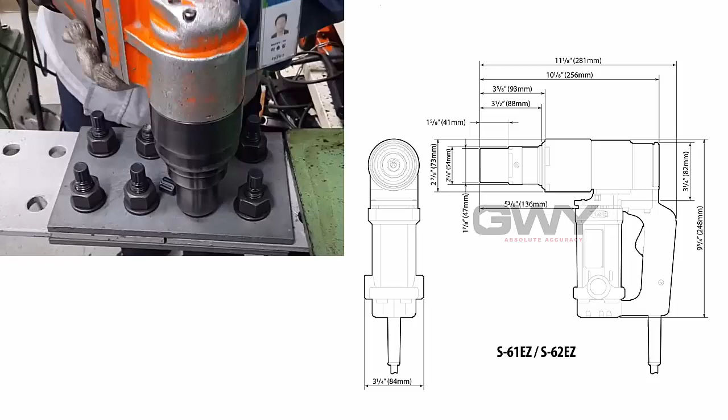When working with structural steel bolts, especially TC or tension control bolts, it's important to understand how the field actually installs those bolts and whether or not there's clearance to install them. If you look at the image at the upper left hand corner, you can see the TC gun or electric wrench, which is fairly large in dimensions based on the image shown at the lower right.

You'll also notice that on the bolt itself, on a tension control bolt, there's an extra spline at the end of the bolt near the nut side, away from the head. The TC gun or TC wrench will actually chop this off or pop it off after the bolt is fully tensioned in the field.

However, from an installation point of view, and whether or not there's enough clearance to install the length of that bolt from a certain direction, it's important to understand that spline length is also included. The Tekla Structures 3D model doesn't include this spline length in the visual display of the bolt, so it can sometimes be misleading whether or not there's enough clearance to install the bolt.

One other thing that's important to understand about bolt installation, especially with TC bolts, is that a TC or tension control bolt is always tightened from the nut side, which is exactly what we see in the image at the upper left. In this case, the bolt itself would have been installed from underneath these plates, stuck through the holes, and then tightened from the top side. This is important to understand for the installation and how the field is going to do these bolts in relationship to how you're going to detail things in the model.

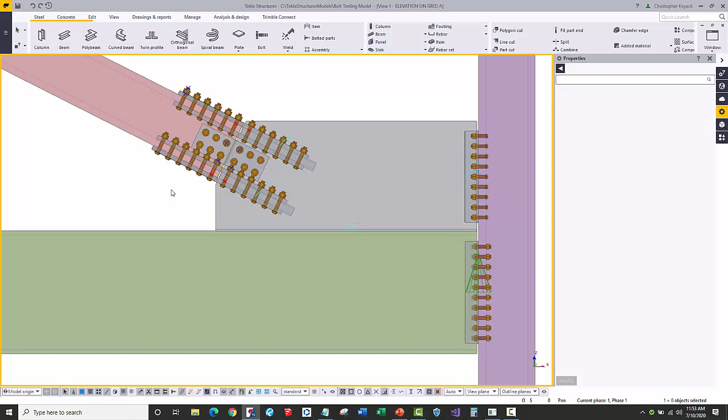Here we have a wide flange brace that is fully bolted. We'll see that there are fairly large bolts here. If we click on this, we'll see that this is a 1 1/8" diameter A490 tension control bolt in a slip critical condition.

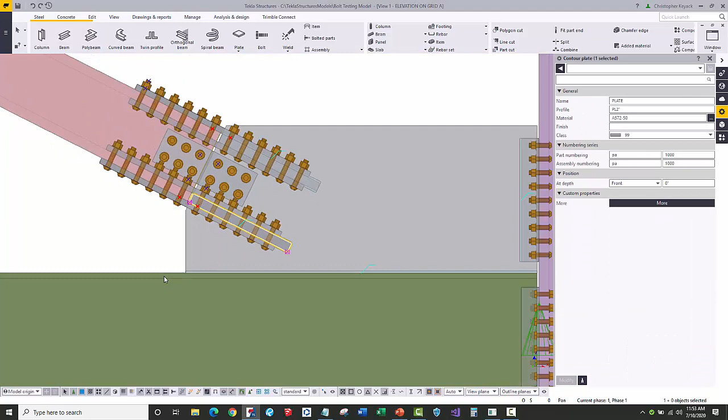Now, when we look at this, you'll see that there are bolts here at the web as well as at the flange. The gusset plate, as well as these fin plates here, are going to be shop attached to the beam assembly. So we need to make sure that this bolt can be inserted in this spot, especially with this field applied flange plate, and whether it can be tightened. We need to determine: can it be installed from underneath here, or can it be installed from within the brace, and is there enough room or clearance to actually tighten this bolt?

To help us review this, we've created a tool called Bolt Clearance Check. What we're going to do is come over here to the Application Components panel, go underneath the JMT Tools group, and there's a Bolt Clearance Check.

Now this is a plugin, so it's parametric. All we need to do is single click on it, and then it's going to prompt us to pick a bolt here at the lower left hand corner. So we'll go ahead and pick on a bolt, and then it says pick the points. The reason why we're picking the points is we're trying to say where the head of the bolt is going to be, in order to show the installation or clearance direction.

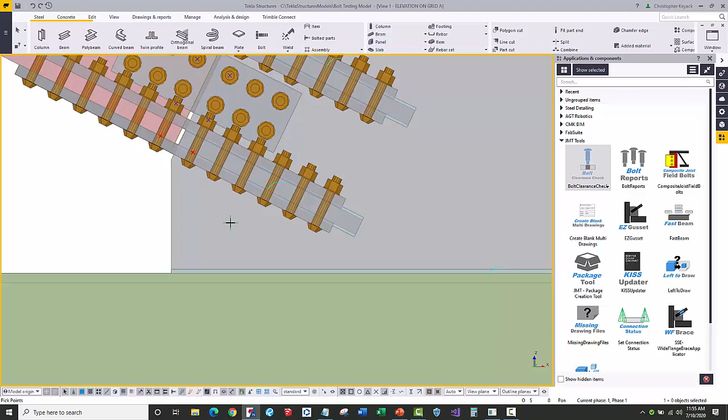Now before we do this, I'm going to double click and open up the dialog box, because there are two different options here: the ability to check the clearance based on bolt insertion, or actually looking at the wrench. You could potentially do both, showing the bolt on one side and the electronic wrench on the other.

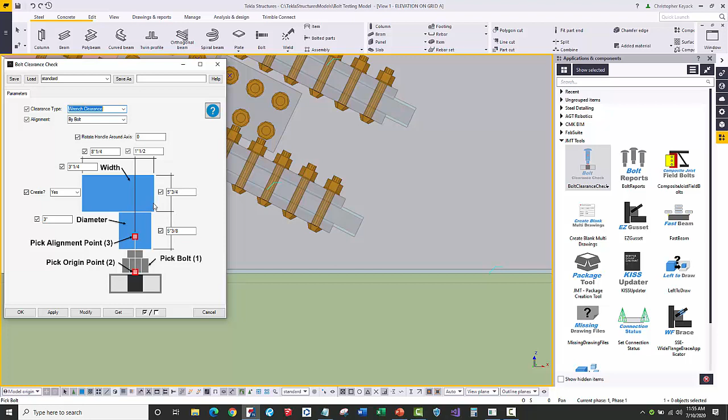If we choose the wrench clearance option, you'll see that the image changes and shows a bunch of different fields that you can fill in based on the size of the TC gun or the heavy hex electronic wrench that you're working with. In the case that you can actually use a hand-driven wrench, like in really tight conditions, you can fill in some of those dimensions as well. Let's go ahead and start with bolt insertion.

Now on bolt insertion, there's the ability to tell it how you want to align the bolt. Do you want it to be based on the actual direction of the bolt and the way it's oriented in the model, or do you want it to follow two specific points that you pick? You have the choice to do either one.

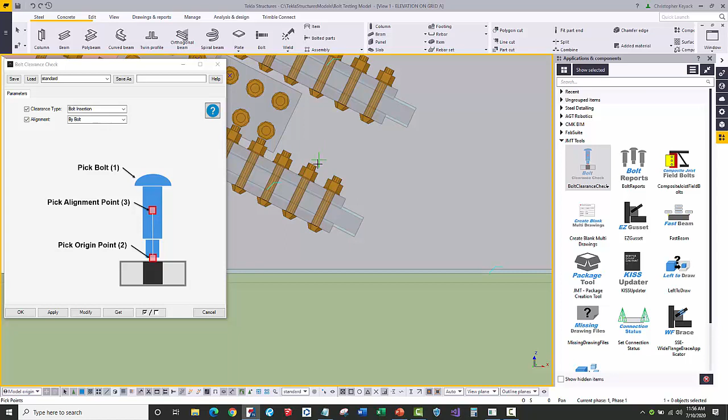At the lower left hand corner, again Tekla is saying pick the bolt. So let's go ahead and pick this bolt here. Then what it says is pick the points. So we're going to pick the first point and then the second point, which is going to determine how or which direction we're inserting this from.

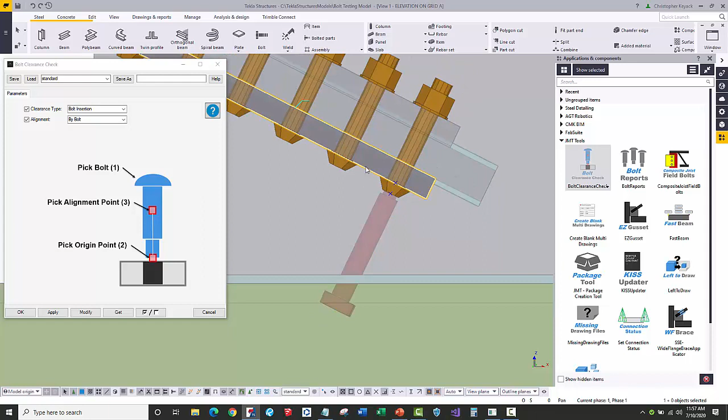I'm going to pick here and then the second point, and you'll see that this bolt will not be able to clear from this specific location that I've put on. Now you could technically have this plate sort of inside near the head of the bolt as you're inserting it, so maybe having it at the face is kind of wrong here.

So let's go ahead and select on the plugin. Again, we have the select components option on, so that way the whole plugin highlights. You'll see the two input points there. You can't just do a right click and move — you actually need to move the work points themselves for the plugin to move.

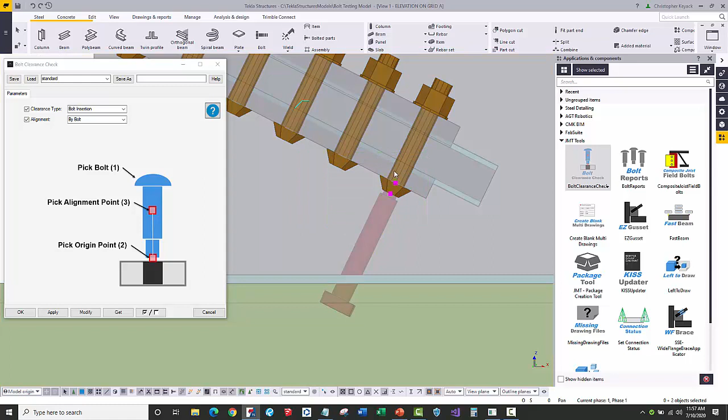So I'm going to hold down Alt and I'm just going to window around those points there, and move them from here to there. And again, we can still see that this isn't going to work and that there's going to be a bolt clearance problem.

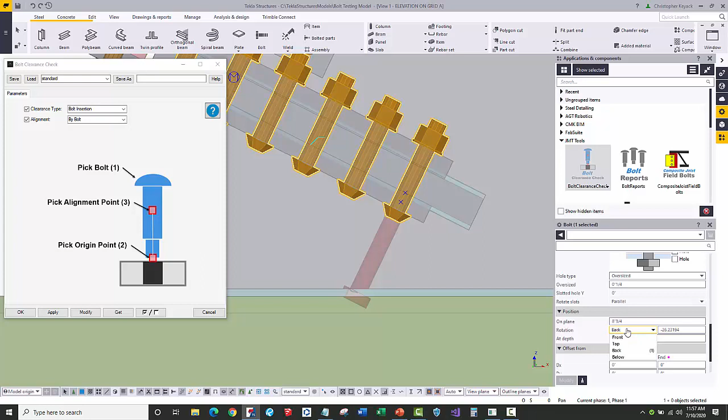Now, when you choose this by bolt option, basically what it's going to do is if I come in here to the bolt group and change the direction or rotation of this, from back to front, it'll actually rotate the bolts around. Now we do need to come in here and move this out again because this is now coming in from the wrong side.

So let's just hold down Alt and we're going to window from those points. And the first point that you pick is actually going to be the point where the tip of the bolt is going to basically be.

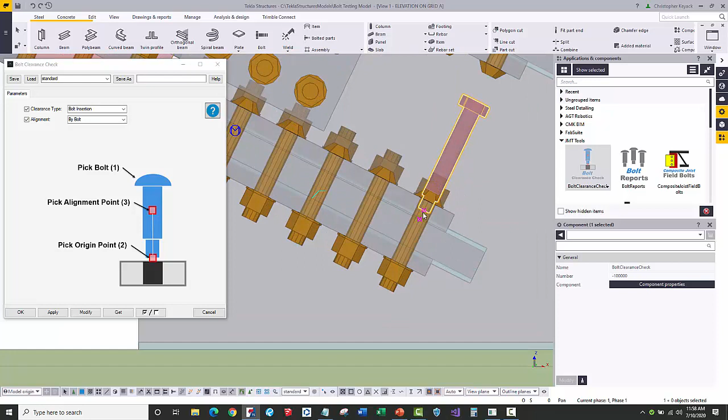In this particular case, this is a TC bolt, and so what we want is for the spline to basically be shown here because it's a tension control bolt. There's a chart that controls and looks at the diameter of the bolt and essentially what the length of that spline, or the diameter of that spline, is going to be.

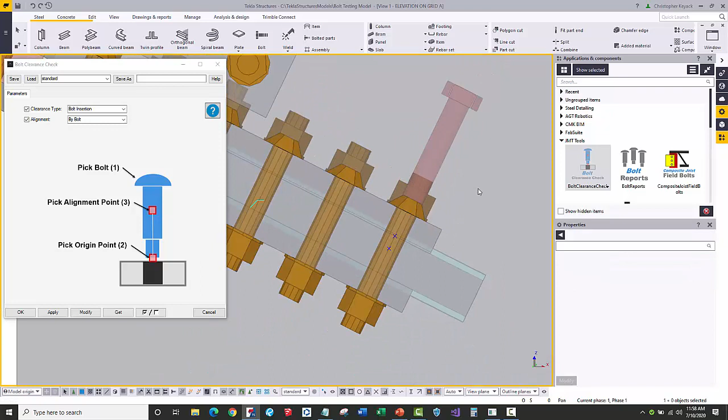So again, you can just continue to move these points until the bolt is in position, exactly representing whether or not there's going to be clearance. So here, I can now look at that bolt, select on it, and I can see that it could be inserted from this direction as long as this plate was basically moved up here along with the head of the bolt at the same time.

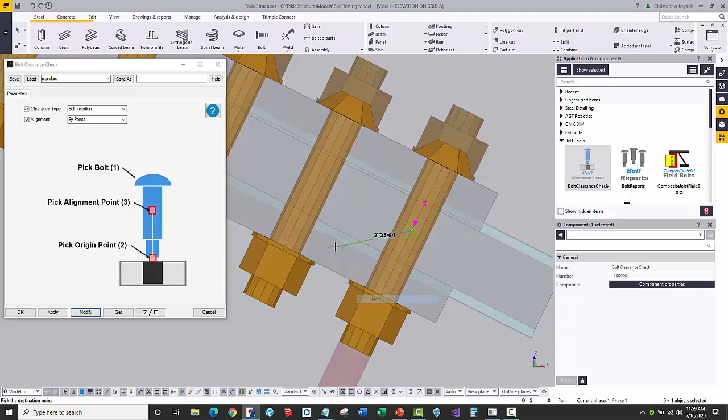Now, if we change the alignment based on points, and I just go ahead and say modify here, you'll notice that it goes back to the first two points that I had picked. And in fact, if I grab one of these points here and just move it to some random location at a diagonal, you'll see that the bolt orientation actually changes and constantly follows the alignment based on those two picking points.

So in order for you to have complete control depending on which view you're in and how you're actually putting in the bolt in which direction, you can choose either to always be aligned by points or by the bolt itself.

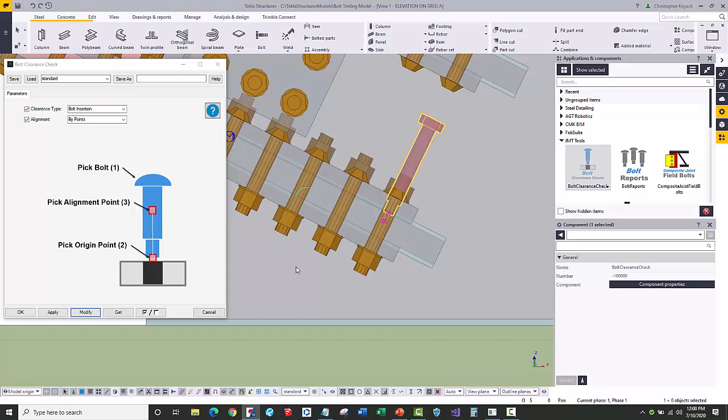Okay, so now let's go ahead and take a look at whether or not we can get the wrench on there. So I'm going to switch this to wrench clearance. And again, these are just some starter dimensions. So you'll need to look up, based on the bolt diameter and the type of bolt that you're working with, what are the dimensions of the actual TC gun.

So this is important to probably ask the fabricator and erector at the beginning of the job. That way you can know exactly what you're going to input on here, and then you can save those settings away. So you'll see that there's some starter settings up at the top, but we could easily make different types of guns and take their names there and save those settings so that way you can easily load them up.

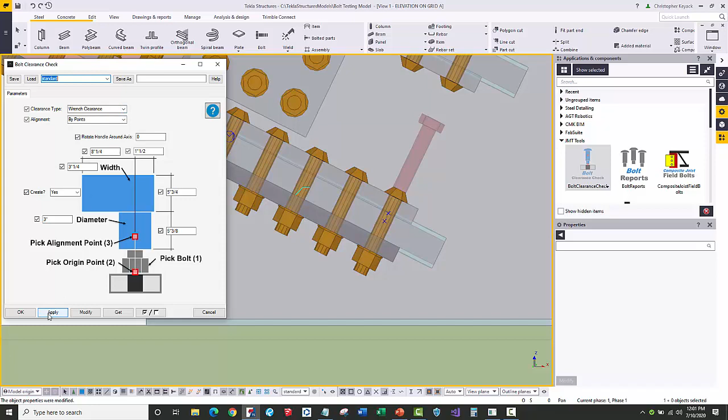Now let's go ahead and do this wrench clearance option. So when we're looking at this, again, we can do by points or by bolt. And what I'm going to do is I'm just going to apply these settings and I'll activate the component again. Again, we'll pick our bolt. And then, well, we'll start here and then I'll pick our second point to just get that wrench in, right? So you'll see that the wrench is kind of aligned in this direction.

Well, what you can do is we can say 180 degrees, press modify, and then you'll see that the handle of that TC gun can be rotated. Or if you do 90 degrees, it just basically rotates around that alignment axis so that way you can see what you're doing. Now, when you modify this, we can see that this is actually with the head of that wrench, or the socket, fully engaged on the head of that bolt.

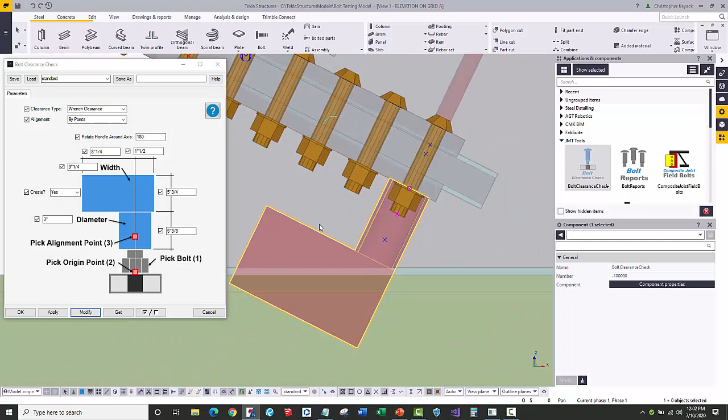Now, let's go ahead and say that, well, in reality, we need to see what that's going to be further out. So if we pull that out again, for some reason, there's a limitation on plugins where you actually have to grab the points and move them out. So again, we'll do that, and then we'll just move it out here. And so this theoretically is a little bit closer to what would really be happening. And in fact, there's going to again be a spline probably on that bolt, and we still have to clear even that.

So again, just at a minimum, this shows you how you can insert a bolt clearance plugin on one side, and then you can put in the electronic wrench or TC gun or even a manual socket size and wrench just to check and see if there's clearance to actually tighten this bolt.

Now, in the case where you can't use an electric wrench, there's actually different sizes of electric wrenches. There's a minimum clearance wrench, and then there's a standard TC gun, which is kind of what these dimensions are. But even minimum clearance TC guns for larger bolt diameters are still pretty large. They're actually about 6 to 8 inches in length here coming off of the bolt.

And so if these conditions don't work and you need a slip critical fully tensioned bolt, then sometimes they have to use what's called a hydraulic wrench out in the field, which is much slower, although it's much smaller and can get into really tight cases.

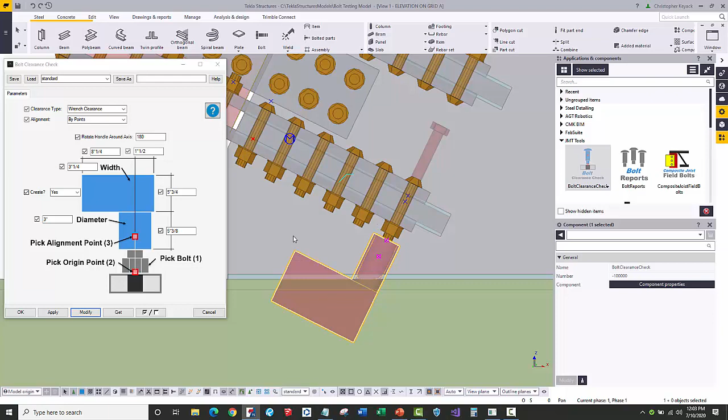So this is why it's important as the detailer to evaluate different types of connections, especially when you have so many bolts like this. And in this case, they need to be fully tensioned to slip critical. And so it's good to be aware of this, bring these issues up, and ask the project manager or fabricator and erector what their preferences are.